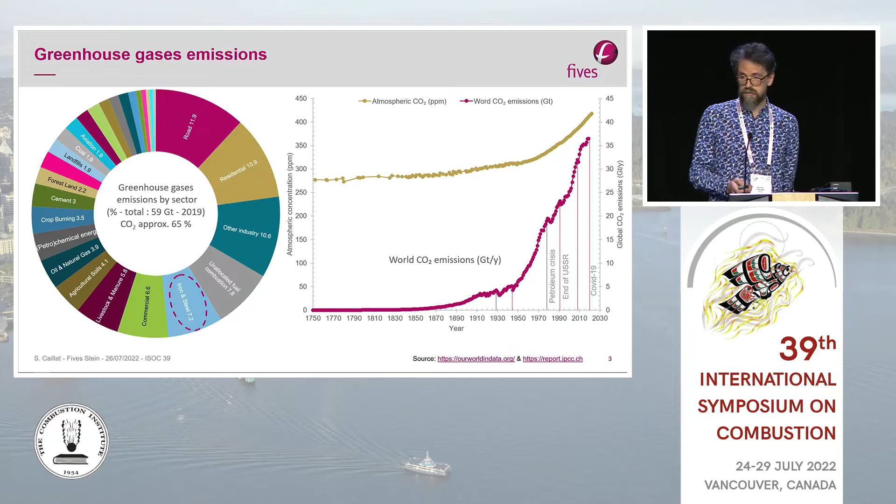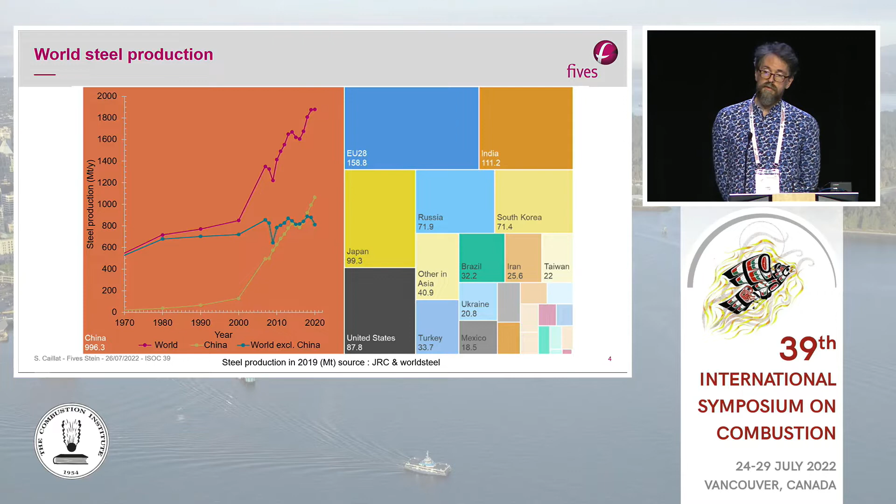And so the link with combustion is coal, because coal is used in a big part of the process to extract the iron from the iron ore. And this consumption of coal is almost the same as the quantity of steel we produce. So it's almost 1.1 gigatons of coal that is consumed every year. So you can do the math if you want, but if you see 1 gigaton of coal that is burned, it's a huge quantity of CO2 that is released in the atmosphere.

And this is where the efforts are to be put now to reduce the CO2 emissions by using other methods of extracting the iron. And the way is called DRI, and for the moment this way is only 5% of the total production, and this needs to be increased. The problem is that there are technical solutions, but it needs a large quantity of electricity if we want to use hydrogen, to create the hydrogen. So we need a nuclear reactor near the place where we produce the steel. This is possible from a technical point of view, but as you can imagine, it's huge investments.

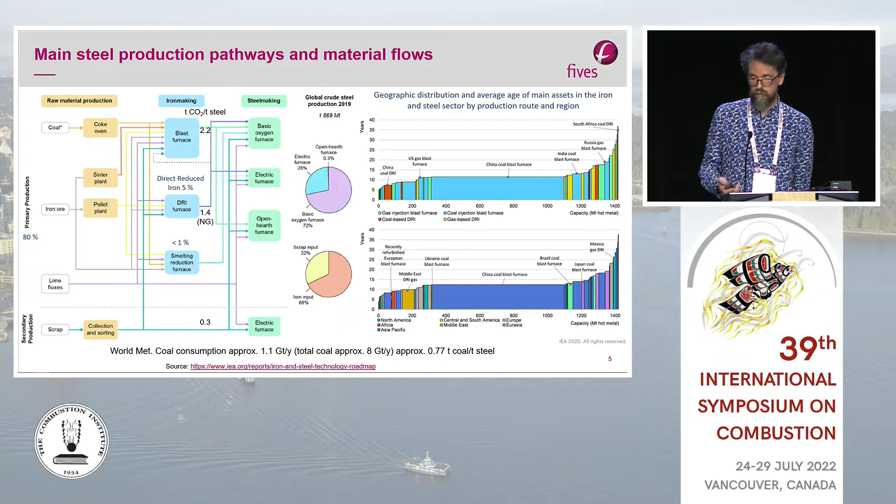And the lifetime of the steel production units is very long. It's tens of years. And on the right side, you have some idea of, I'm sorry, it's a little bit small on the screen, but it's all the steel producers in the world and the average age of the plants. And since the lifetime can be tens of years, if the plant is 10 or 15 years old, we will have to wait 10 or 20 more years so the investments are possible. Otherwise, the plant is too new to make some major changes. It will be absolutely too expensive. So this is in short.

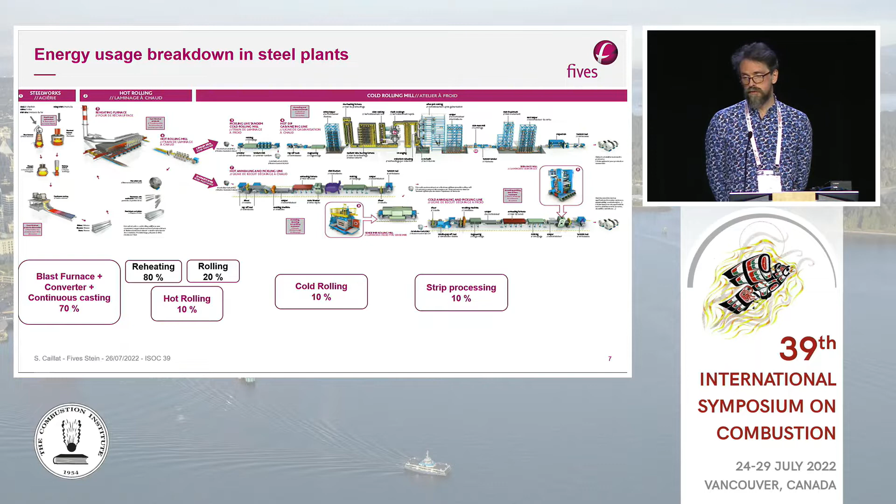Here is an example of what we make in our company. We are not the only one. Just to show where the energy is used. Most of the energy is in the steel production, but also 30% is in the part where, after you make the steel, you must transform it to make it usable to make a car, chairs, whatever you want. And this also is 30% of the energy that is used, and also everybody is working on how to reduce the CO2 emissions from this area of the steel production.

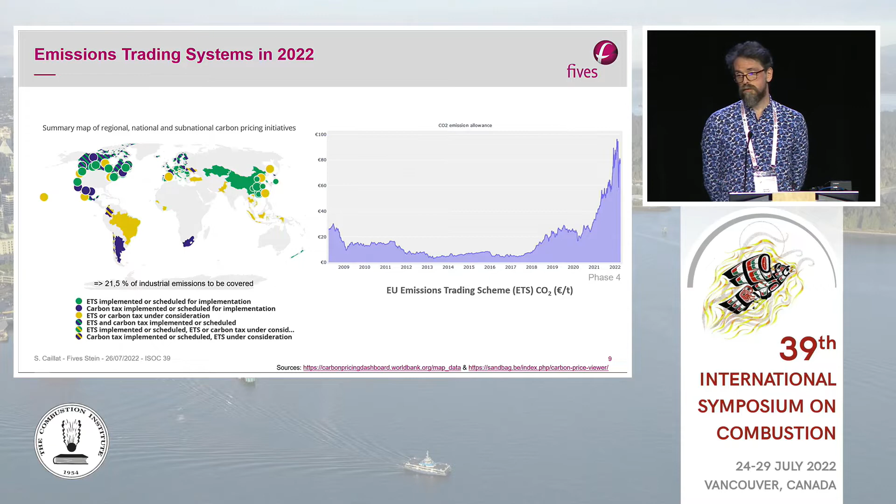For example, this is the price in Europe, and you can see that there is a huge increase in the price of CO2 emitted. So this is an important point to push to lower the emission. So that's all for me.

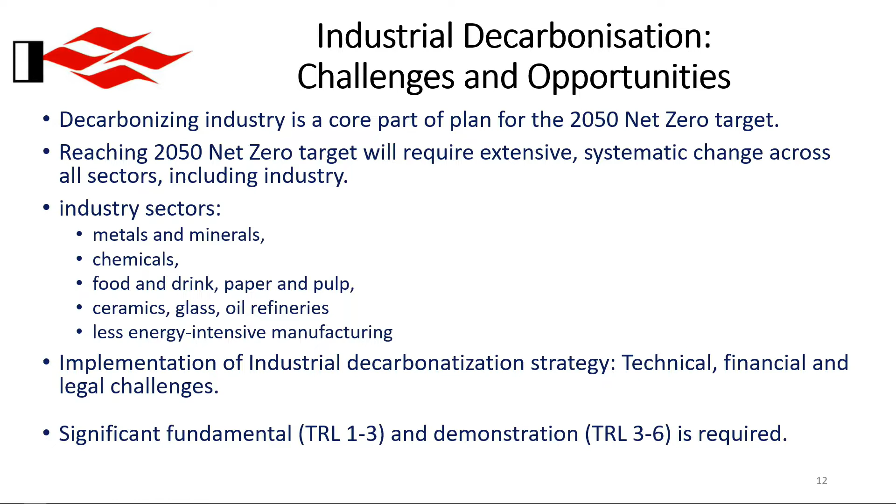So, if we look at the very recent data from the IEA, the Tracking Industry 2021 data, you clearly see the reason Sébastien just talked about, why industrial decarbonization is important. Looking at the data for 2020, global emission from industry was around 8.7 gigatons of CO2. That's around 26% of global emissions, even taking into account that there was a reduction in 2020 of 1.6% due to COVID-19.

Now, if we want to reach the net zero target by 2050, we have to reduce this CO2 emission at a global level to under 6.9 gigatons by 2030. And that is a big challenge for researchers and for industry, to make sure that we find the technology pathway to deliver that. Next slide, please.

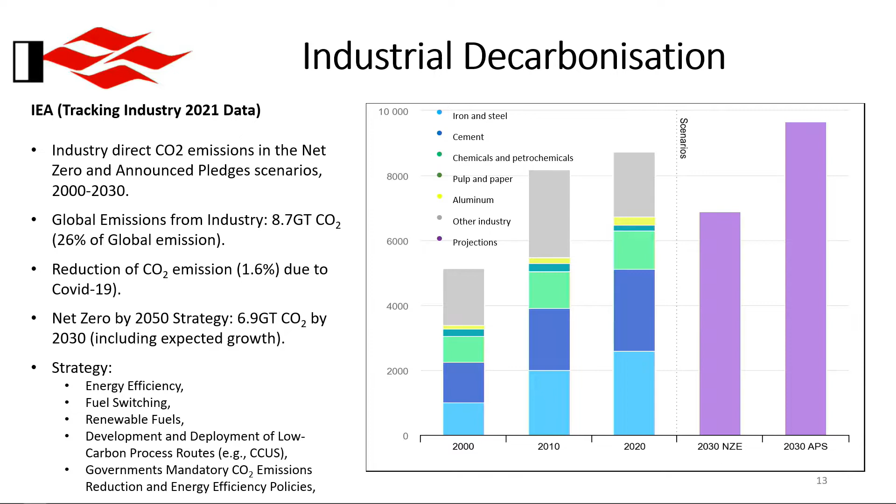So where do industrial emissions come from? Of course, we need fuel for the production of the feedstock required for the manufactured product. We need fuel for heat and cooling. We also need fuel for process heating and cooling systems, as well as for powering the machinery.

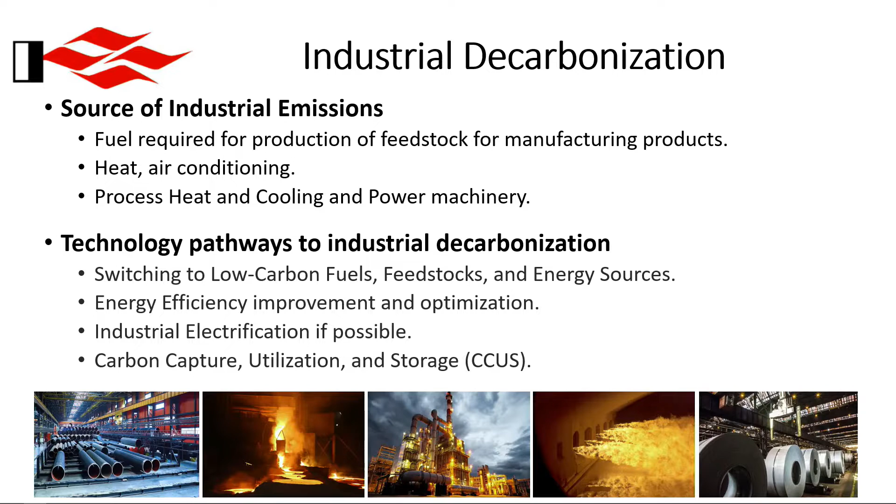Now, the technology pathway to industrial decarbonization is clearly defined in a number of important pathways. This includes, as you may have heard a lot about and done research on, carbon capture, utilization and storage, industrial electrification, and, I mention it with a cautionary note, energy efficiency improvement and optimization, and switching to low carbon fuels such as hydrogen and even hydrogen carrier fuels like ammonia. Next slide, please.

Now, what are these industrial decarbonization technology pathways? Well, if you look at energy efficiency, I believe it is the most cost-effective option in the near term. With the lowest cost, you can reduce the CO2 emission, by simple technology like installing or improving heat recovery systems, utilizing waste heat, especially low temperature waste heat, and also upgrading processes and equipment. In addition to that, we can also look at strategic energy management at the system level, which will also improve energy efficiency.

Carbon capture, utilization and storage is, of course, a technology that is available now, part of it, but it is an expensive technology. Existing technology that can be implemented includes oxy-fuel, and pre- or post-combustion CO2 capture using different solvents. However, where research is needed and where we can improve or implement

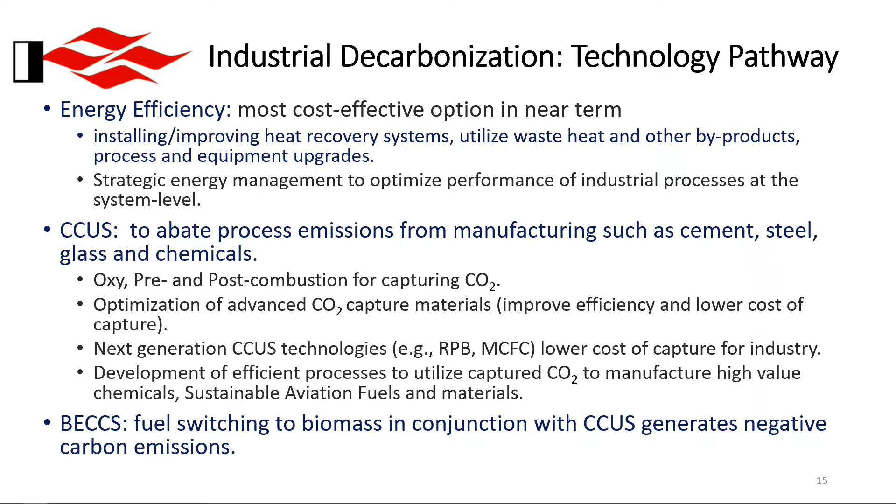And continuing with that technology pathway, fuel switching from fossil fuels, such as coal, liquid fuels or natural gas, to low carbon fuels, such as electricity if it's produced from renewable sources, or biomass, hydrogen or ammonia. So in this sort of area, development of fuel flexible processes and energy systems is important. How flexible is that energy system that can use different fuels? The availability of biofuels or biomass, and how to integrate these new systems with different technologies.

Now, as I mentioned before, industrial electrification is also important, provided the electricity is produced from renewable sources such as wind, or even nuclear, but it is not applicable to every technology, or every industrial process that needs to be

decarbonized. And finally, hydrogen, where at this moment there is a lot of interest in hydrogen to be used for industrial decarbonization. But two key points: if you want green hydrogen or low carbon hydrogen, the cost of hydrogen at this moment is very high, and also availability is an issue. And I'll show you the reason for it. Next, please.

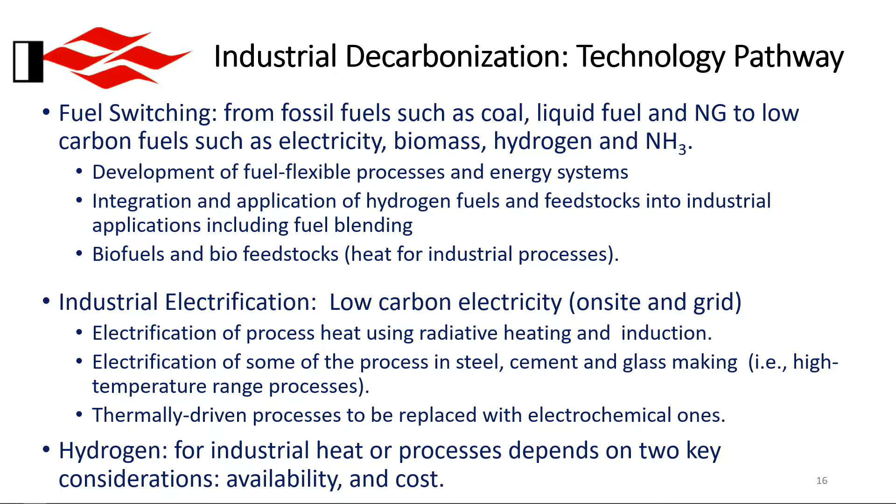Next slide, please. Yes. Now, if you look at demand for hydrogen, you can see that in every sector there is a requirement for hydrogen if they want to decarbonize. Whether you're using it for decarbonizing heavy industry or transport or heat for commercial or domestic use, all require hydrogen. And that hydrogen can only come from renewable sources or nuclear energy, green hydrogen, or blue hydrogen

from natural gas. However, that option, at least in the UK and in Europe, is under question because of the security of natural gas supply and the high cost of hydrogen. So based on that sort of reasoning behind industrial decarbonization, let's look at what the IEA Net Zero 2050 states. Next slide.

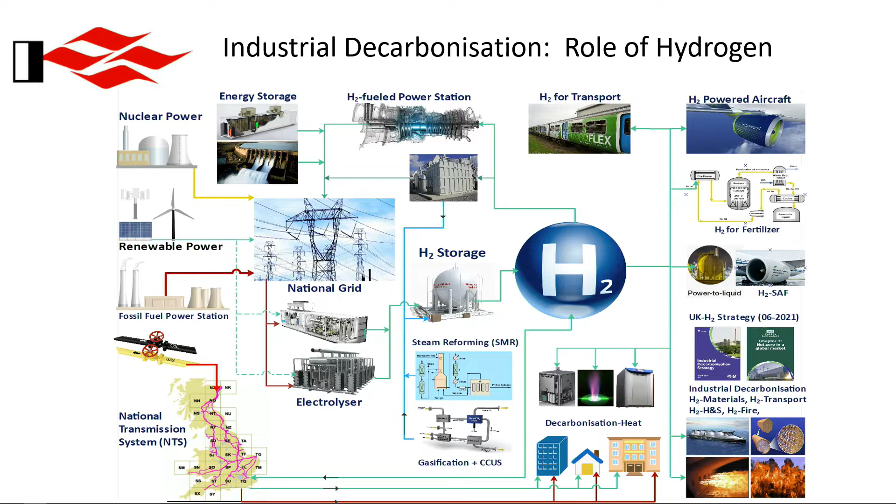Next slide, please. Yes. There are 7 key pillars that have been identified in IEA Net Zero 2050 that are very important in order for us to reach the net zero target. And number 5 of these key pillars is hydrogen and zero carbon fuels.

And if you look at that prediction, as reported by the IEA, you will see that different sectors within industry, like refineries, iron and steel, chemicals, all these different energy intensive industries, by the year 2050 will use plenty of hydrogen, green hydrogen or blue hydrogen if available, in order to contribute to that net zero target.

And these numbers clearly show that at this moment, for example, the refineries use some, chemicals again, and other uses, but you see that the use of these fuels in other sectors in industry significantly increases over the next 30 years. Next slide, please.

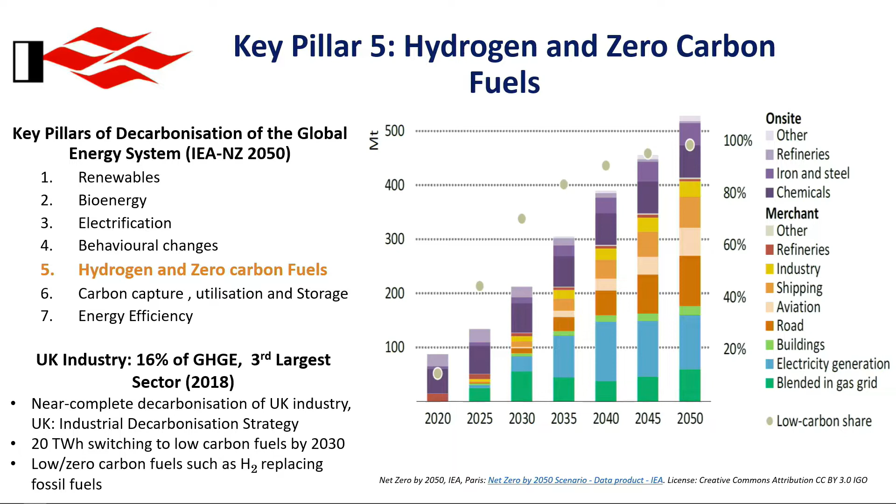Of course, at the Combustion Symposium, our research colleagues know that hydrogen was one of the first fuels that was looked at. And especially if you look at the first Combustion Symposium proceedings, you will see that a lot of hydrogen research has been reported. At the time that, for example, I was starting my PhD, I used to look at the papers that Professor Graham Dixon-Lewis and Professor Alan Williams did in the 1960s on hydrogen.

So hydrogen combustion has been looked at in great detail, especially by the researchers from the Combustion Symposium. It has certain properties that are beneficial to the combustion process, and there are also some disadvantages associated with it. Next slide, please.

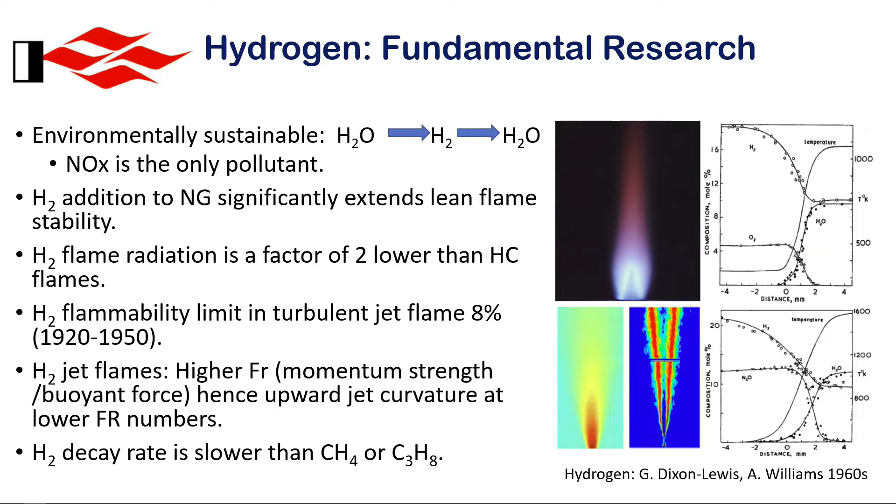One project that we have been working on in the UK, funded by the UK government, is looking at how to decarbonize, for example, the industrial sector using biofuels and comparing that to hydrogen. Some of these data will be published very soon, but if you look at these data, you clearly see that for hydrogen, before industry invests significantly in it, there are some fundamental challenges that need to be identified and resolved, and solutions found for them.

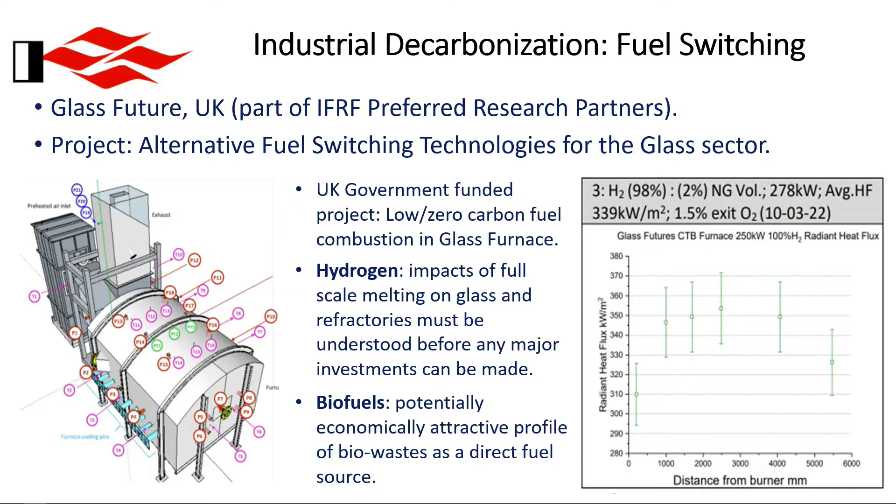And on the biofuel, this fuel that was produced from waste is also limited in availability, but potentially economically attractive for direct replacement of the fossil fuel. And finally, just to look at, next slide, to look at this

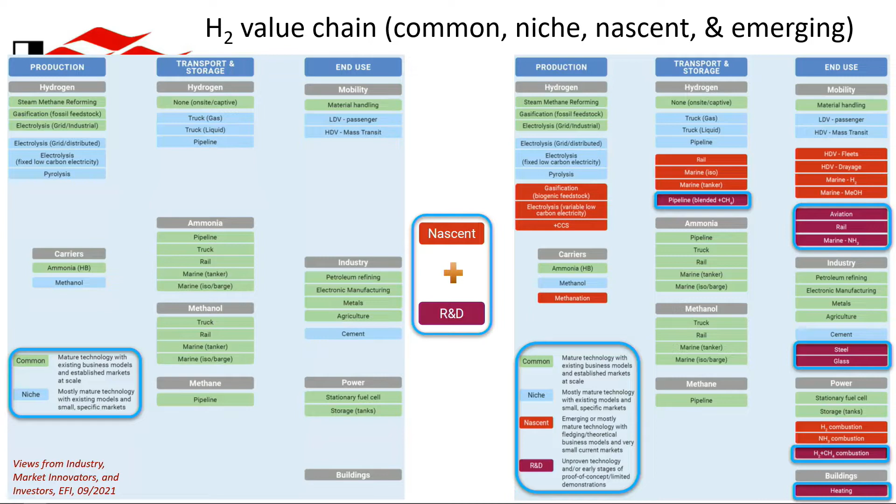So just next one. And there is a lot of international collaboration that you... Mohamed, you have 1 minute left, please. Yeah, sure. Thank you.

And I would recommend you to have a look at the CEM. And next one, please, my concluding remarks. So, the foundation to deliver net zero for industry. What is important? Carbon pricing, not only at the national level, but at the international level. Market regulation, decarbonization standards for development and investment flow, and making that culture change to get consumers to choose low carbon products, or getting investors to choose low carbon for investing.

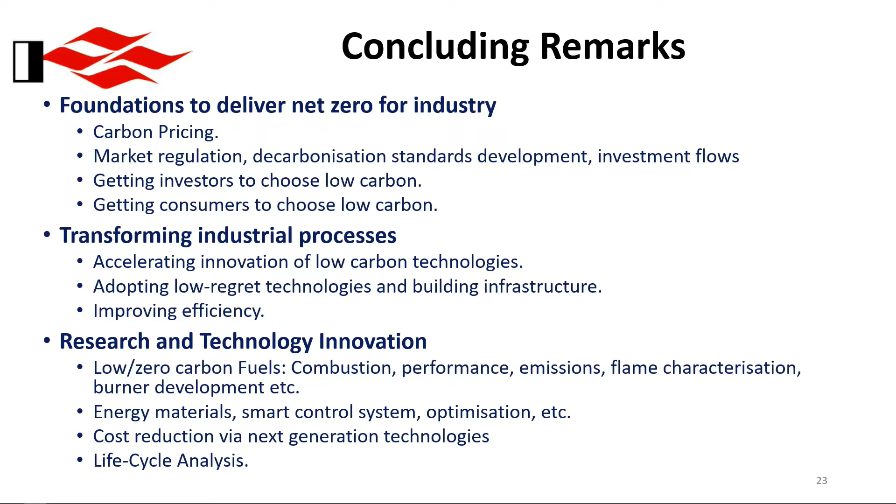In terms of transforming industrial processes, accelerating innovation of low carbon technology is important. Adopting low-regret technologies and building infrastructure is important, and improving efficiency. And finally, research and technology innovation in terms of low and zero carbon fuels, combustion performance, emissions, flame characterization, burner development, energy materials, especially for hydrogen, smart control systems, and cost reduction. Technology is also important, and we should not forget, whatever we do, we need to look at life cycle analysis. The next slide is mainly for the flame foundation, but let's go through two of them together. Next, please.

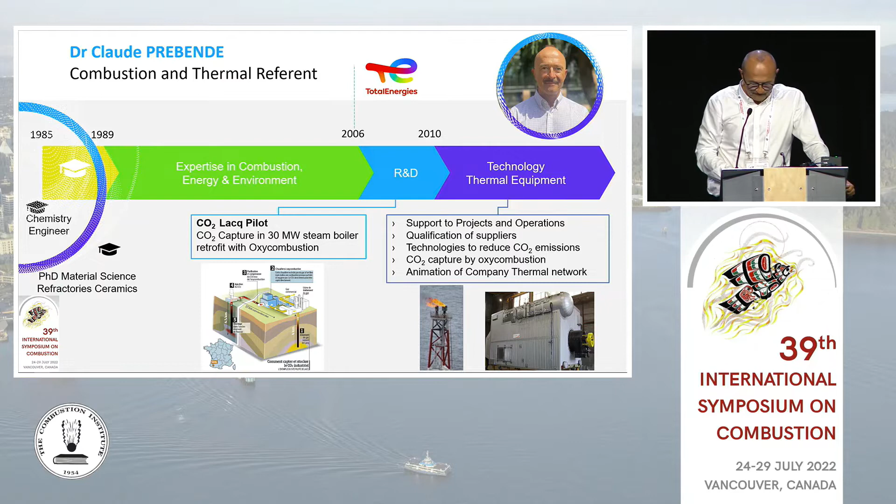Today I am in charge of fired equipment specification and mechanical design in our oil and gas facilities, offshore and onshore, refineries, petrochemicals, and power plants. More and more, I am involved in an R&D program to reduce CO2 emissions. Total Energies is a major international oil and gas company and has existed since 1924, almost 100 years. My company is undergoing a profound change. Last year, Total became Total Energies, a new name for a new ambition to become a major player in the energy transition and to achieve carbon neutrality by 2050, together with society.

Historically, Total Energies continues to produce oil and gas, mainly liquefied natural gas. And for 16 years, Total Energies has been involved in solar energy by developing a new generation of photovoltaic panels, and more recently, wind energy, mainly offshore. The purpose of my presentation is focused on the solutions we are implementing progressively in our facilities to decarbonize our operations.

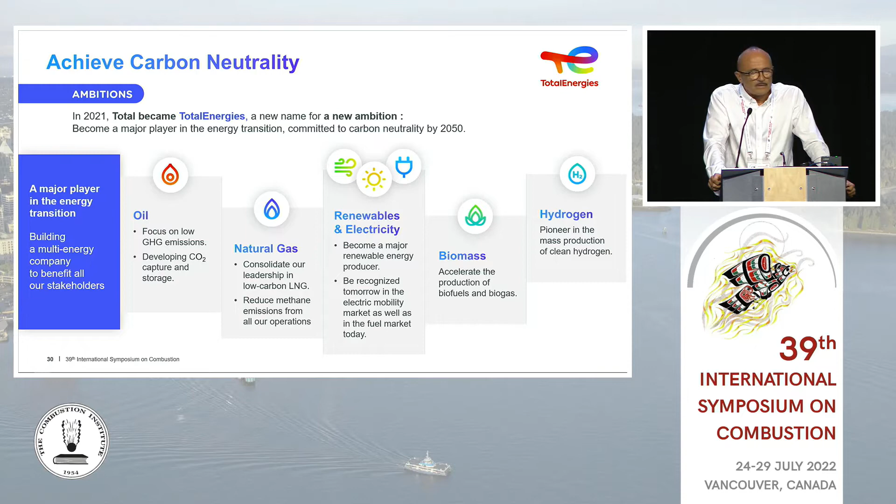In the past and today, the CO2 emissions come from gas turbines, boilers, furnaces, other fired equipment, and flaring. We measure the methane emissions in our flare flames ourselves with a drone. In fact, there is insufficient air inlet in the flame to burn all the flare gas. And you know that methane is more than 25 times as potent as carbon dioxide at trapping heat in the atmosphere. There are two paths to reduce GHG emissions. Either we reduce or replace hydrocarbon fuel gas, or we capture emitted CO2.

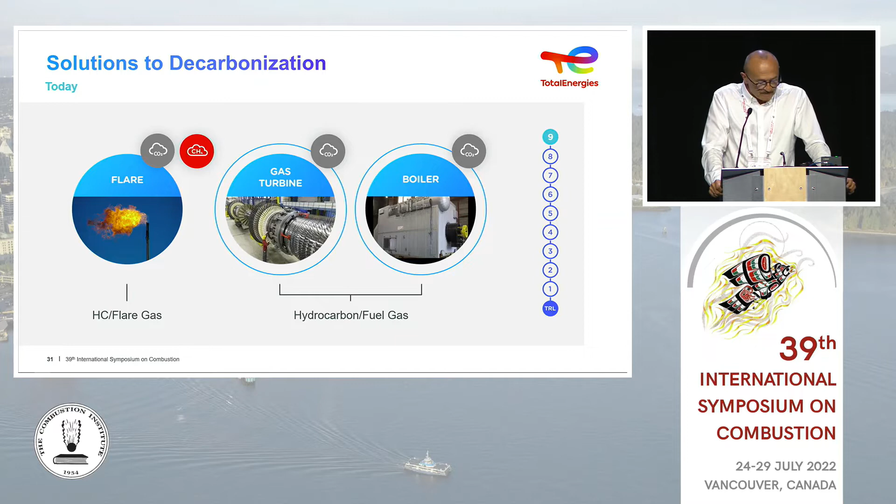The first solution is the recovery. It's better to valorize the recovered flare gas instead of burning it. And we recover the heat from the hot exhaust gas from the gas turbine to produce steam, and this steam is used in the steam turbine to produce high efficiency electricity. The maturity of the technology is very high.

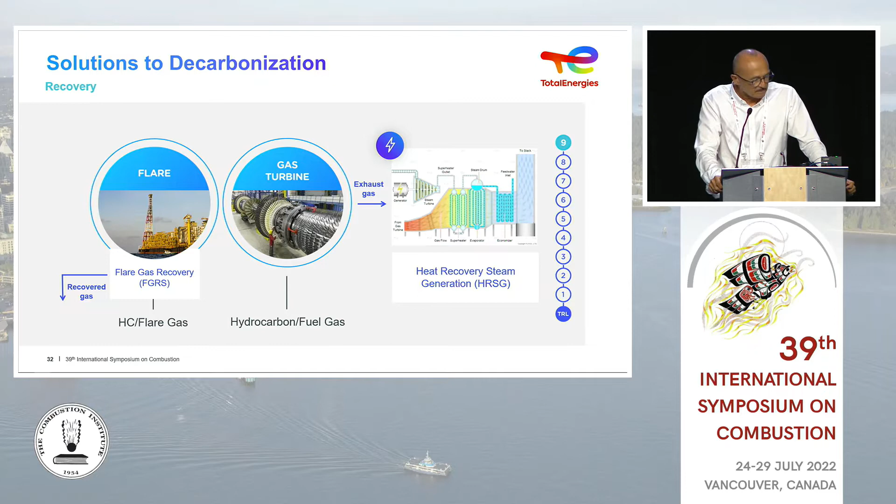The second solution is electrification. As I told before, Total produces renewable energy by solar and wind energy. On the right, you see an electric boiler which could replace a gas firing boiler, but there are two challenges to implement this technology: to install high voltage electrical supply, and to control the water quality, mainly the conductivity of water, because this technology is based on electrodes.

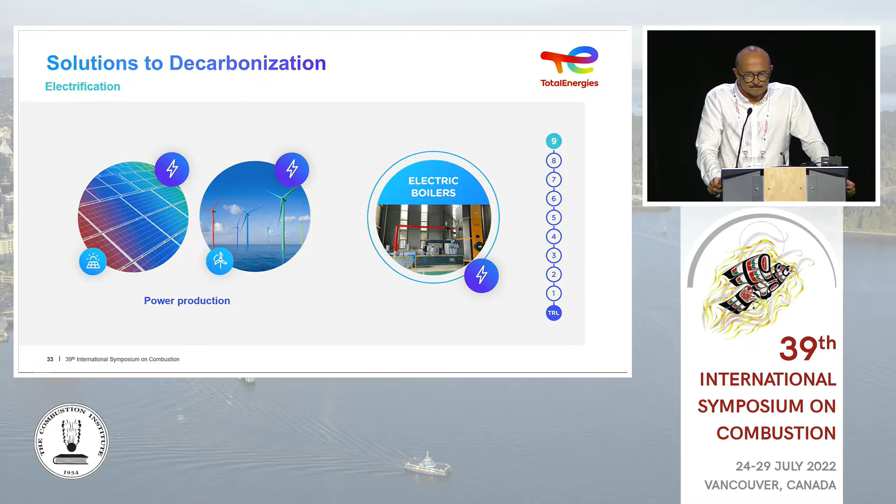And the strategy of TotalEnergies is to use hydrogen and ammonia mainly in the gas turbines, because we have 200 gas turbines in our fields, and it's very difficult to control the CO2 emissions. Using hydrogen and ammonia this way is a good way. The challenge is to control the NOx emissions, the stability, the thermoacoustics, etc. There were many conferences yesterday about this topic. And there are simulation, modeling and testing programs ongoing with laboratories.

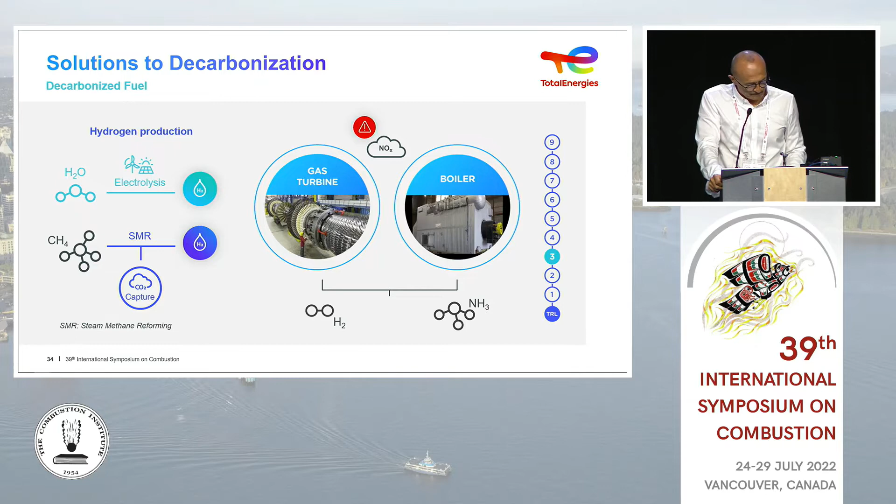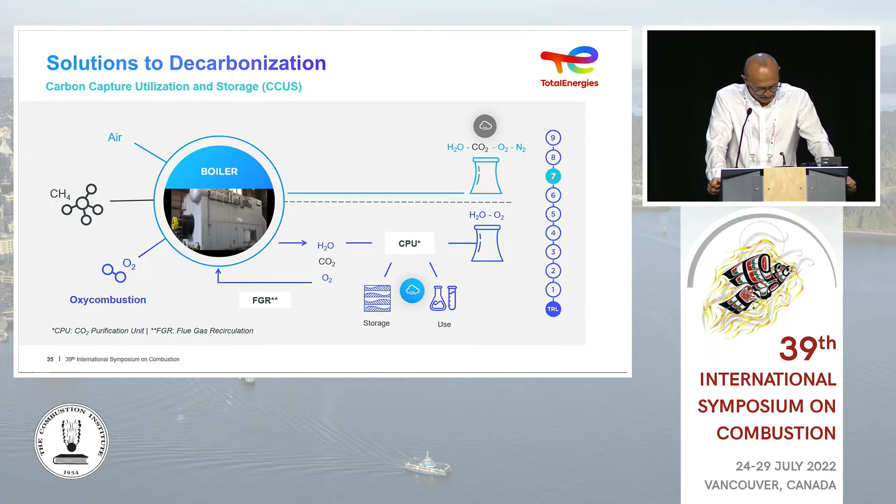In conclusion, I would say that TotalEnergies encourages all researchers around the world to develop these emerging technologies as efficiently and as quickly as possible, to integrate them in our facilities or our partners' and customers' facilities, because we are committed to carbon neutrality by 2050.

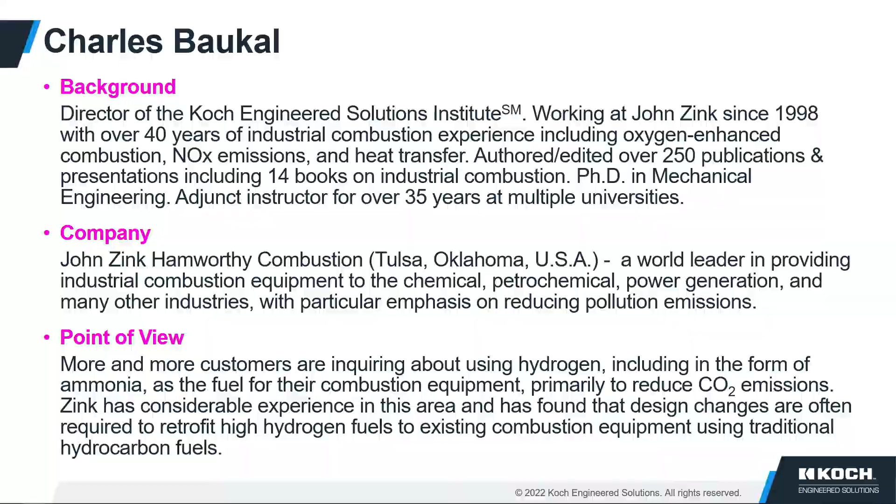John Zink provides equipment to the refining, the petrochemical, chemical, and power generation industries, and TotalEnergies is one of our customers. So we're coming at it from the perspective of how do we burn various fuels. And as you know, there's lots of interest in using hydrogen for combustion, predominantly because it doesn't make any CO2. It also doesn't make any carbon monoxide or smoke. And according to IEA, it's an important piece in the Zero Emissions 2050 puzzle.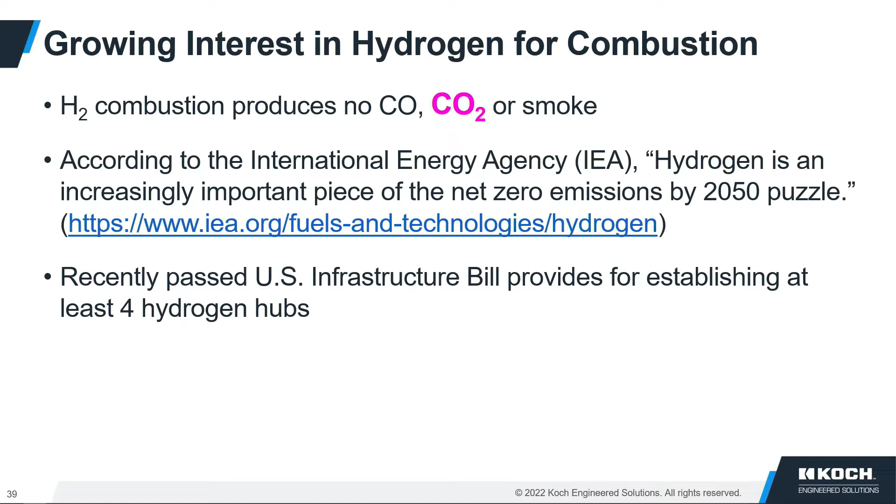In the United States recently, an infrastructure bill was just passed where they want to establish at least 4 hydrogen hubs. Next slide, please. I live in the state of Oklahoma, and we are looking at partnering with a couple of neighboring states to form a hydrogen hub. For our test facility, we get our hydrogen from Louisiana, and that's about a 12-hour drive by tanker truck. So we don't have any large-scale hydrogen production at the moment in the state of Oklahoma, and that may change with this hydrogen hub.

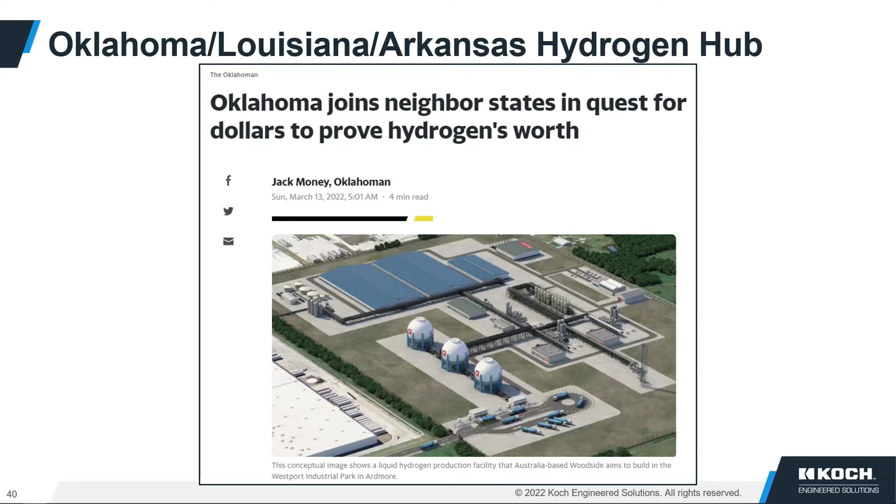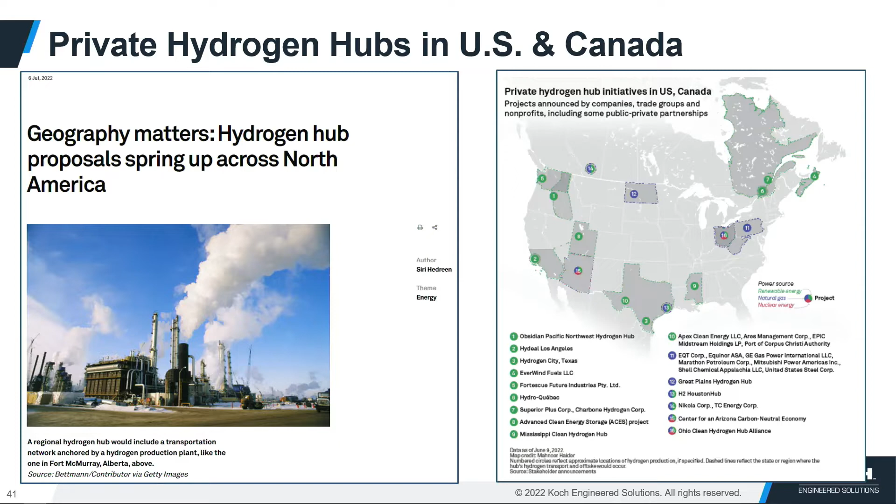Next slide, please. They're looking at establishing hubs not only in the United States, but also in Canada. The map on the right shows a bunch of them that are in the planning phase now. So great interest in forming these hydrogen hubs. Next slide, please. In Japan, Mitsubishi is establishing a park dedicated to hydrogen combustion, particularly with power generation.

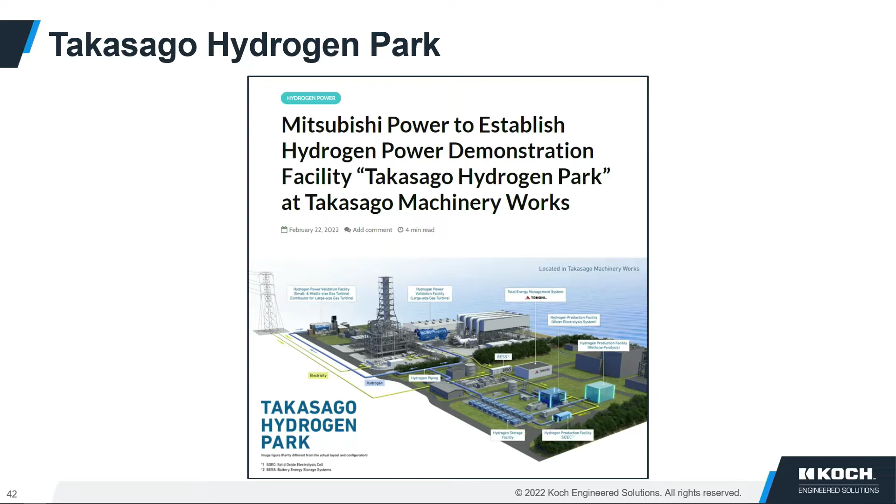By coincidence, this morning, there were 2 things that appeared in the news that were new, at least to me. One of them is the Nuclear Hydrogen Initiative, where 40 participants are getting together around the world to look at using nuclear energy to produce hydrogen. And the second one is a company called EPRO Advanced Technology has developed a powder that's predominantly silicon. So in a powder form, you can take this chemical, drop it into water, and it generates hydrogen. And if that is successful and cost effective, that would be a major advancement because, as you know, one of the challenges with using large-scale hydrogen is transportation. So if you could use a solid powder, that would really give a lot more flexibility.

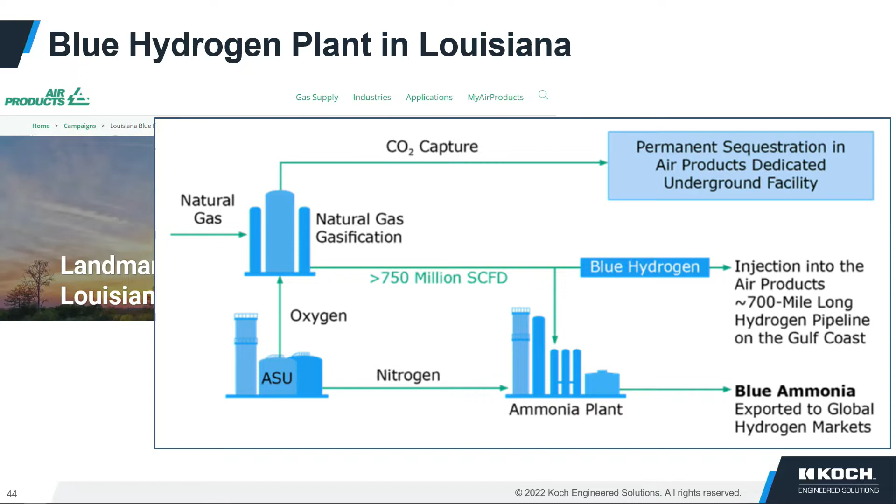Next slide, please. And the U.S. Department of Energy has a very big program looking at all aspects of hydrogen, its production, its distribution, its usage in a variety of industries. So lots of interest, lots of research being done in this area because of the potential of eliminating CO2, depending upon how you make the hydrogen.

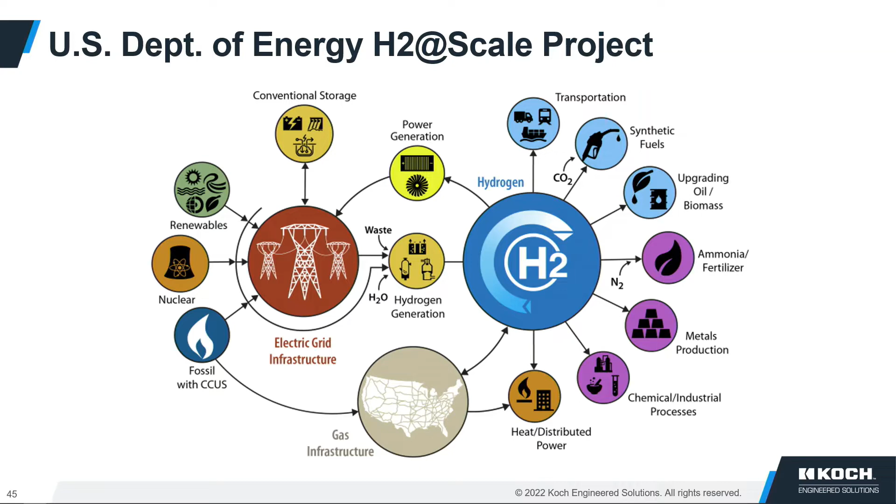Next slide, please. So you've heard a little bit already about different colors of hydrogen. Of course, hydrogen doesn't have a color itself, but when we talk about how it's made, it depends on what is the source of the hydrogen and what's the energy used to make it. And you've heard about blue and green hydrogen. If you were to make hydrogen with electricity from nuclear power, that would be considered red. Some folks call that pink. So a variety of ways we talk about that. And of course, the holy grail is to make it with renewable energy, such as wind, hydro, and solar.

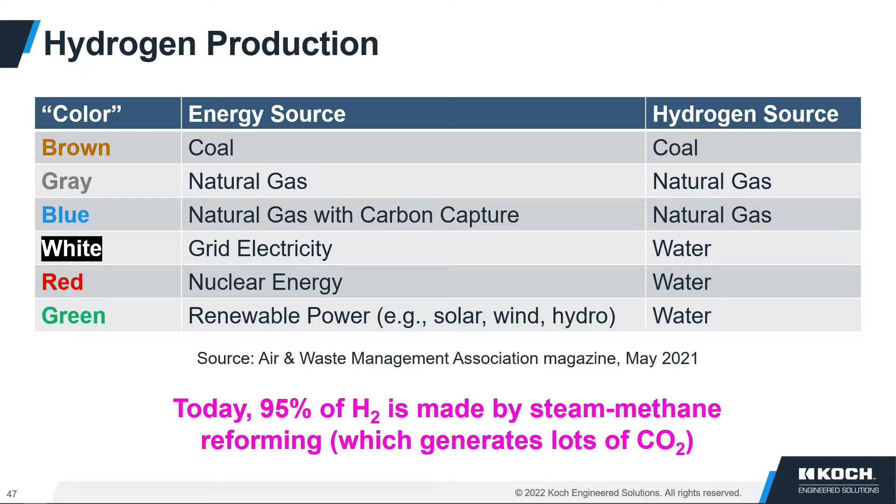And next, please. Currently, 95% of the hydrogen that's made in the world is by steam methane reforming, and that unfortunately generates lots of CO2. So it's very cost effective, but it's not very environmentally friendly. So this is what's being targeted, especially using electrolysis with electricity made by something other than a fossil fuel.

Next slide, please. So you at the symposium are very well aware of the differences between methane and hydrogen. We have a lot of experience burning hydrogen, but it is a different fuel. So if customers think that they can simply change a valve and switch from one to the other without making any changes, that's probably not going to happen. The changes, generally speaking, are not major, but nonetheless, they do need to be taken into account. On the good side, hydrogen is very easy to burn.

From a combustion engineer's perspective, we don't have to be very accurate with our mixing, but on the negative side, it's a small molecule, it has a high diffusivity, it leaks very easily, it has a very wide flammable range, so it's easy to ignite, and therefore the transportation and storage is clearly an issue for that.

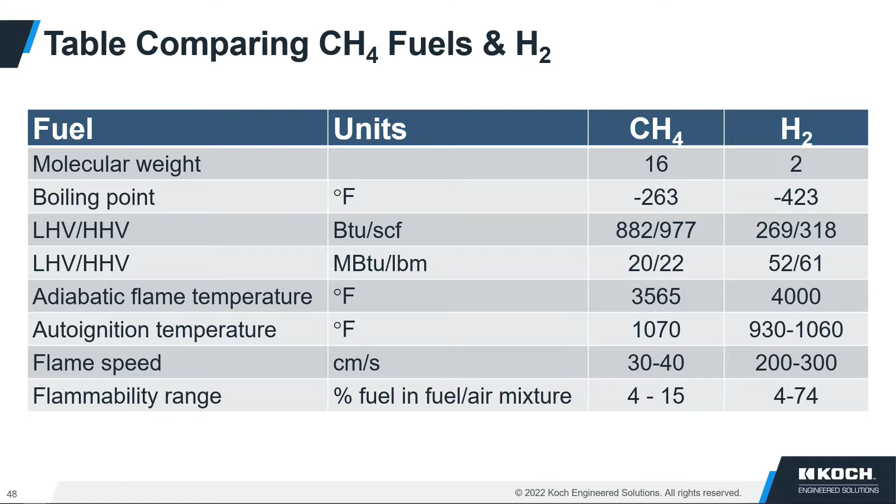Next slide, please. So clearly the main advantages are no CO and CO2. Depends on how we make the hydrogen, of course. If we use steam methane reforming, which is the current way today, then we can make lots of CO2. But if we use renewables and electricity, we can make that almost zero.

Another potential benefit, not nearly as of high an interest as reducing CO2, but hydrogen requires less air compared to other fossil fuels. And that means if a customer is limited on their capacity, they may be able to increase that just by switching fuels. Next slide.

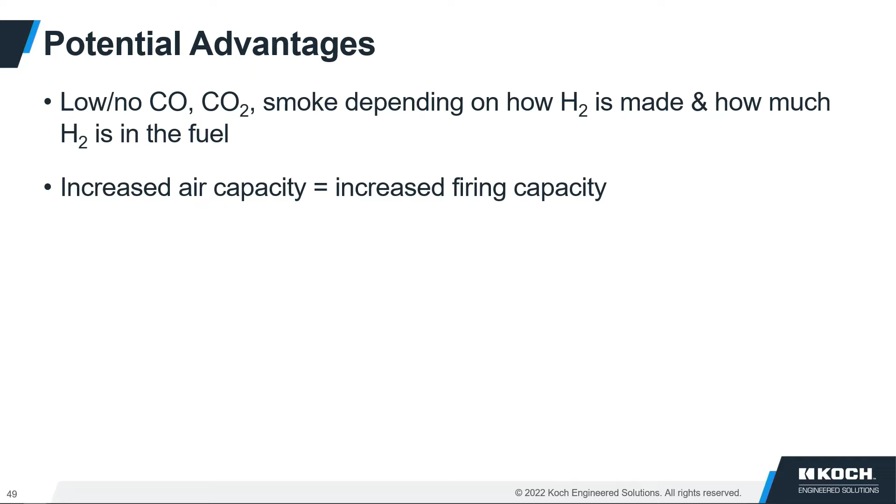And as you heard, one of the potential negatives of using hydrogen is more NOx. It has a higher adiabatic flame temperature, and therefore that higher temperature generates more thermal NOx. The good news is there's no prompt NOx, but in general, in most industrial applications, the prompt NOx is a relatively small portion of the overall NOx.

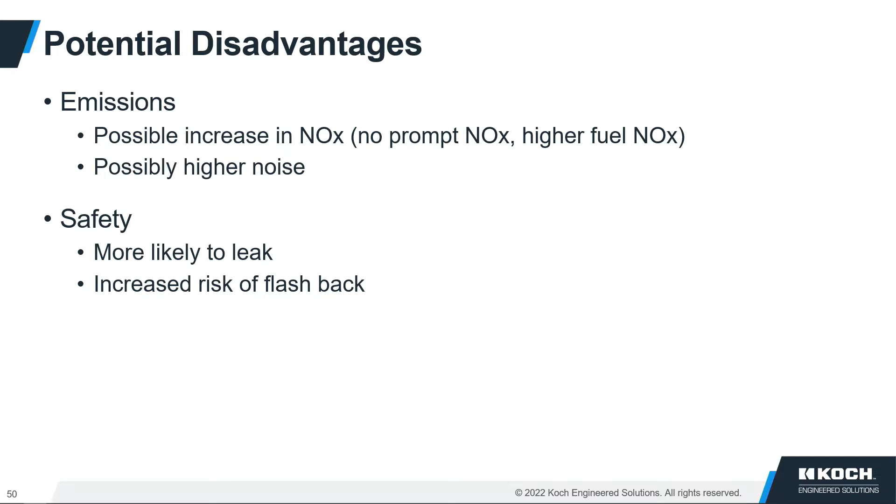Next slide, please. And of course, safety, we just mentioned that. Not only does it have a higher propensity to leak, but it also has increased risk of flashback. Next slide, please. So in conclusion, hydrogen has the potential to eliminate CO2 and soot emissions. Next. It is different than most other fuels, so that needs to be taken into account. Next. So we do recommend thoroughly analyzing processes before making the switch.

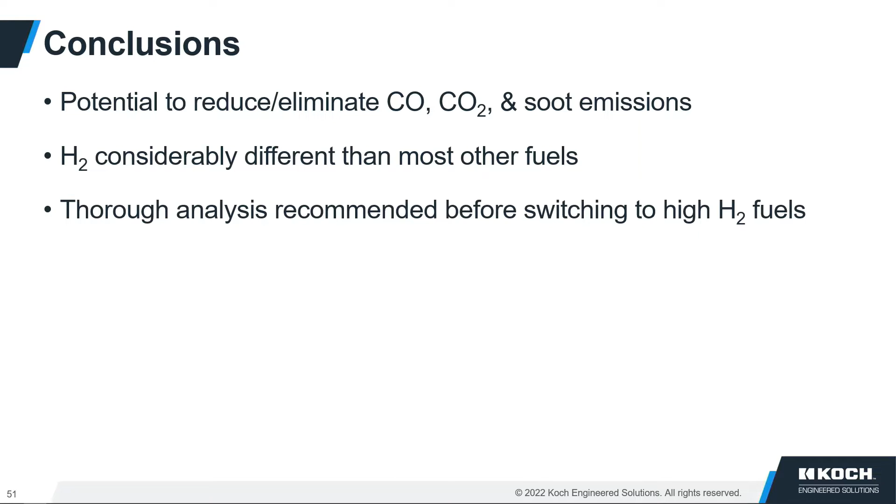And you're going to hear more about this later, but ammonia might be a good intermediate because it's much easier to carry ammonia than hydrogen as a gas itself. And to answer the question at the very beginning, is hydrogen an important future fuel? I would say probably, maybe even definitely.

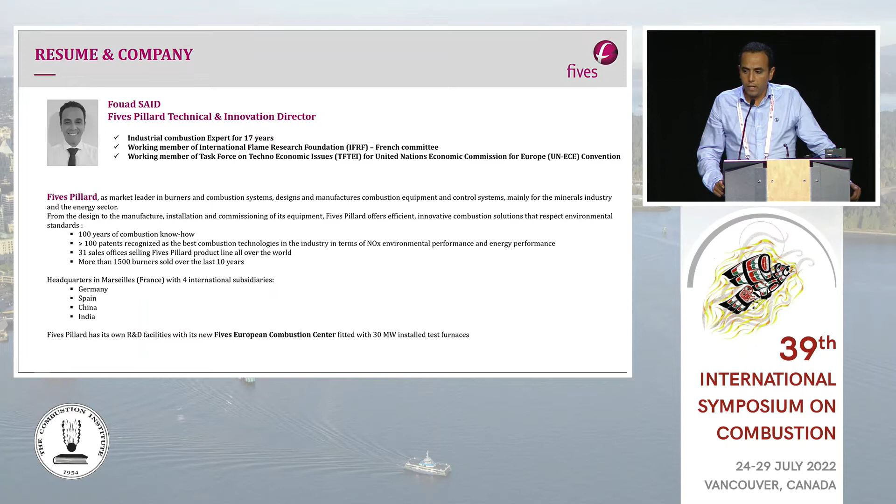In terms of R&D, we have our own facilities based in France, our European Combustion Center, with 30 megawatts installed test furnaces. I've been working as an industrial combustion expert for 17 years. I'm a working member of the International Flame Research Foundation, member of the French committee, and I'm also a working member of the task force TFTEI, Techno-Economic Issues, for the United Nations Economic Commission, especially for Europe.

So today, I will talk about the cement industry. As you probably know, the cement industry is one of the biggest polluters in the world, with around 8% of the total CO2 released in the atmosphere. So you can imagine that the cement companies try to figure out this problem and propose solutions. The first one to reduce the CO2 footprint in the cement industry is to have a good burner. Good burner design means optimizing and reducing the specific consumption, how much energy is needed to produce 1 ton of clinker. So this is the basis.

On top of that, we are also proposing smart burner technology, smart sensors, which are located on the burners and connected to gateways and DCS in order to monitor all the burner parameters for a better adjustment. Another common way to reduce the CO2 footprint in the cement industry is the usage of what we call alternative solid fuels, ASF. Could be plastics, shredded tires, fabrics, and so on. And there are 2 ways to valorize this ASF: combustion or gasification.

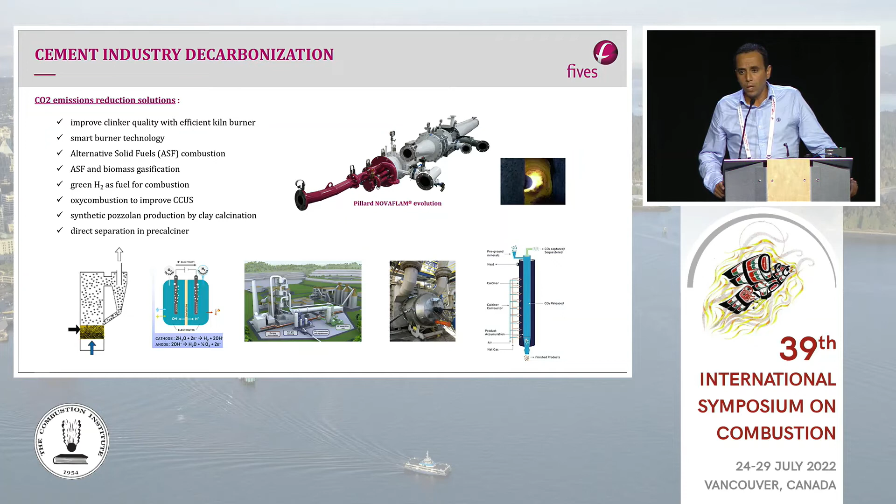So I wanted today to have a special focus on the oxy-combustion in the cement industry, which is combined with firing alternative solid fuel, because this is one of the most promising technologies under study. But of course, there are some technological locks.

The first one concerns the alternative solid fuel modelization, because when we are talking about solid particles, it is hard to have a good idea of the size, the shape, 2D shape, 3D shape, the density. There are no universal models for the CFD computing.

We need to take into account the different phases, so drying phases, devolatilization phases, the combustion of the volatiles, the combustion of the solid fractions, the particle swelling, the radiation, and of course, the ash management. So we are trying to build some solid models in order to be able to modelize any type of alternative solid fuels.

The second technological lock concerns the chemical reactions inside the kiln, because of course when we are talking about oxy-combustion, we are talking about high temperature levels, 2,500, 2,800 degrees C, and we need for sure to have a CO2 flue gas recirculation in order to master the kiln temperature level.

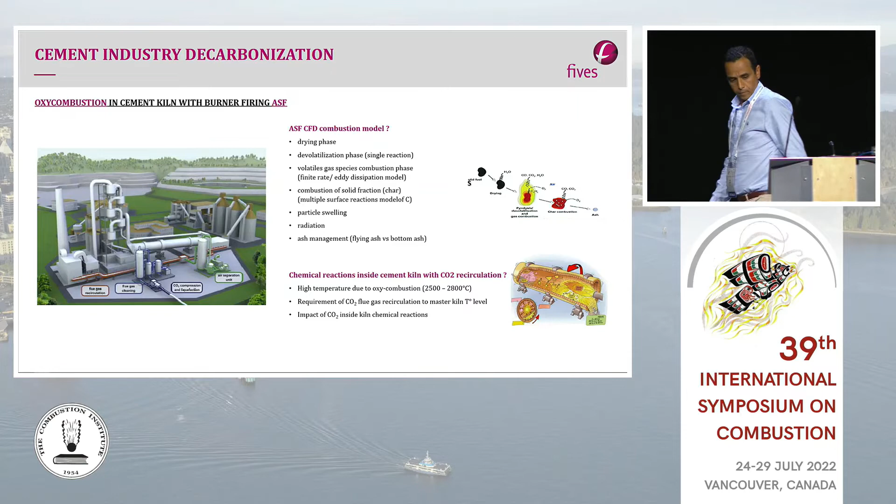Okay. Thank you very much for the opportunity to make a presentation here. My name is Fujimori, from IHI Corporation. IHI Corporation is one of the Japanese heavy industries. And we supply power generation systems such as boilers, gas turbines and internal combustion engines. And also we supply ammonia production plants, power plants, and chemical plants.

So today I'd like to introduce the current status and the challenges for ammonia power generation. And this is generally my conclusion: maybe the solution for energy transformation depends on the local conditions, such as energy resources, renewables, and economical and geographical situations.

For now, I come from Japan. Japan is very, how to say, isolated geographically and also geopolitically. It's very difficult to connect wires or pipelines to neighboring countries. So in that case we need energy. Also, the hydrogen should be transported by ships. So in that case, ammonia could be one of the solutions.

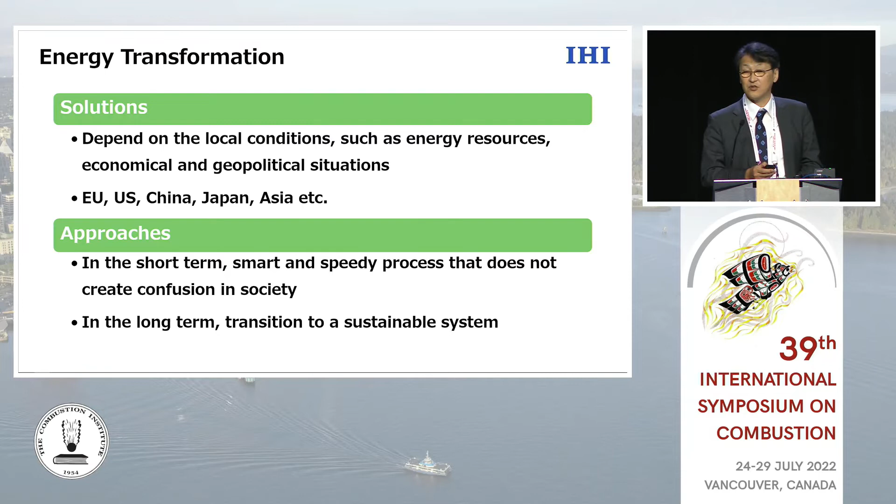And also another point is how to realize this process. I think in the short term, a very smart and smooth transition process is necessary, which does not create confusion in society. And in the long term, of course, sustainable systems.

And ammonia is categorized in the hydrogen-based family of fuels, so everything comes from hydrogen. And ammonia is combined, as you know, with nitrogen in air. And the other pathway, the bottom line, is synthesis with CO2. CO2 is captured from exhaust gas or so on.

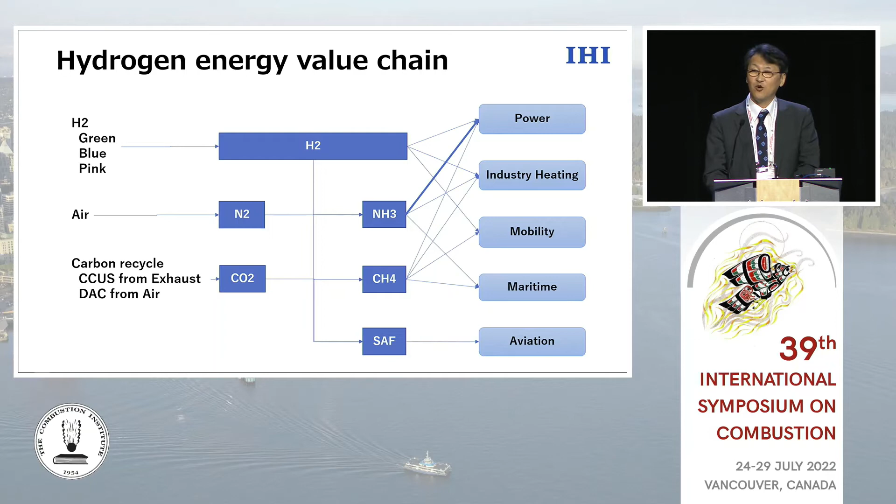And for ammonia, the right-hand side is utilization of ammonia. One of the main paths is power generation. And also, ammonia could be used for industrial heating. And now a very hot topic is maritime, for ship engine fuels. So our company is actually involved in all processes, but today I'd like to talk about power generation.

This is ammonia's value chain, and as the previous speaker said, for ammonia and hydrogen there are basically many colors of hydrogen. I just say blue and green ammonia, and now blue ammonia is very promising for mass production, but it's necessary to capture CO2.

And also the ammonia carriers and storage, as you have shown, already exist, because it's already an internationally traded product for fertilizer or chemical feedstocks. And the issue is how to use it for the energy transformation. That is the technological challenge for ammonia to establish ammonia value chains.

In yesterday's sessions, one question arose: how much hydrogen goes from Australia to Japan? I just estimate that if the hydrogen is 100, maybe in Japan it's about 65 to 70, if you use a best practice way. That's a kind of answer to the question.

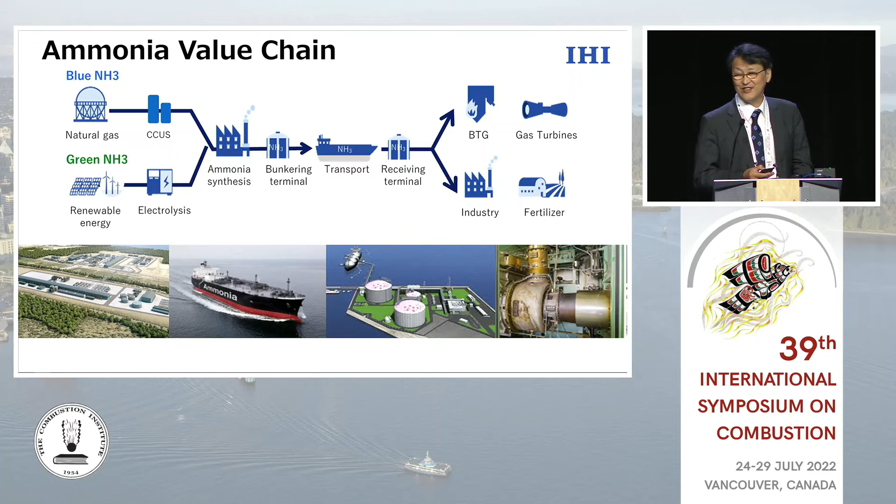Today I'd like to introduce two power generation methods. One is co-firing with coal combustion, and this project is already going to the semi-commercial stage. This picture shows JERA's 1,000 megawatt coal-fired power station. The reason why we chose to start with coal co-combustion is low technological risk, and also low cost, easy implementation and speed. That's why we started from this position. But this is, how do you say, the beginning.

It is to establish ammonia supply hubs. In the future, of course, increasing the co-firing rate or maybe ammonia solo combustion boilers will be considered. Technologically, at present, we achieve 20% co-firing. The NOx emission level is the same or less than coal combustion itself, so no change is necessary for gas treatment systems. Heat transfer is a very minor effect, maybe 2 or 3% change, so it can be accommodated by present boiler designs. So we started from this one.

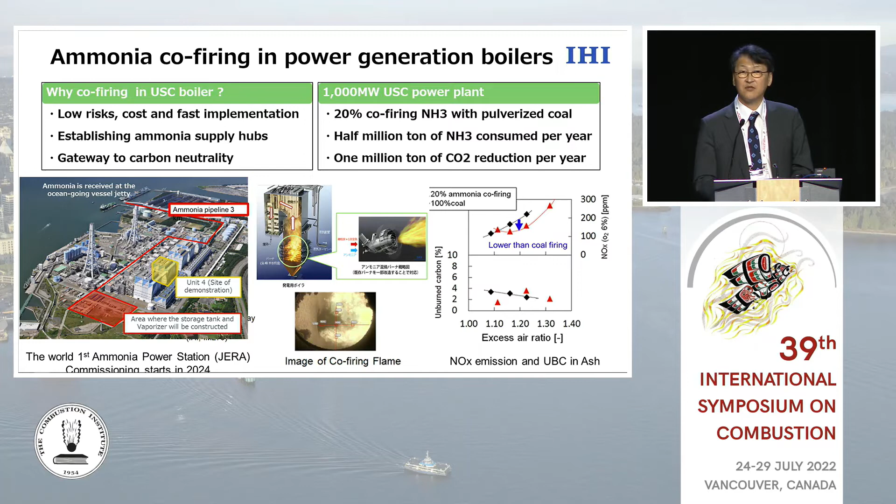The next one is ammonia co-firing with gas turbines. In the future, more efficient gas turbine power generation systems are necessary, so we are also seeking to develop combustion technology for gas turbines. Now we choose spray ammonia combustion systems. The reason is that in the future, these plants will work with renewable energies and also meet demand. So quick response and flexible operation is critical, especially for middle class or smaller class gas turbines. So in this case, we chose this system.

It is also technically very simple, just pushing up with pumps, with no need for a vaporizer and no need for reforming or cracking systems. So it's very easy to operate for changing load speedily. This graph shows what we achieved: a 2 megawatt small gas turbine with 100% pure ammonia combustion.

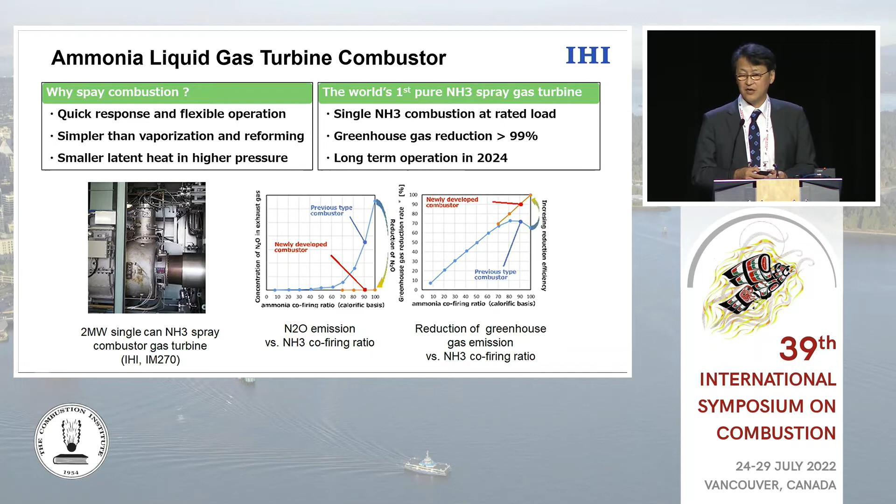The middle graph shows N2O emissions. In the previous model combustor, pure ammonia combustion actually generates N2O. The right-hand graph is the greenhouse gas emissions reduction rate. As you see, N2O has a very strong greenhouse gas effect, so with pure ammonia combustion the greenhouse gas emission reduction is decreased. But the new combustor achieves very satisfactory performance and almost no N2O emissions. So at this stage, the spray ammonia combustion system is very promising, we think. But still, we are looking for further development for reducing NOx emissions.

This graph shows the challenges for realizing ammonia technologies. The first one is the supply chain, where cost is the most important issue. In combustion, flame stability is very critical, and also NOx emissions. This is a kind of trade-off relation, so combustion technology should meet two very difficult tasks. That is the ammonia combustion challenge.

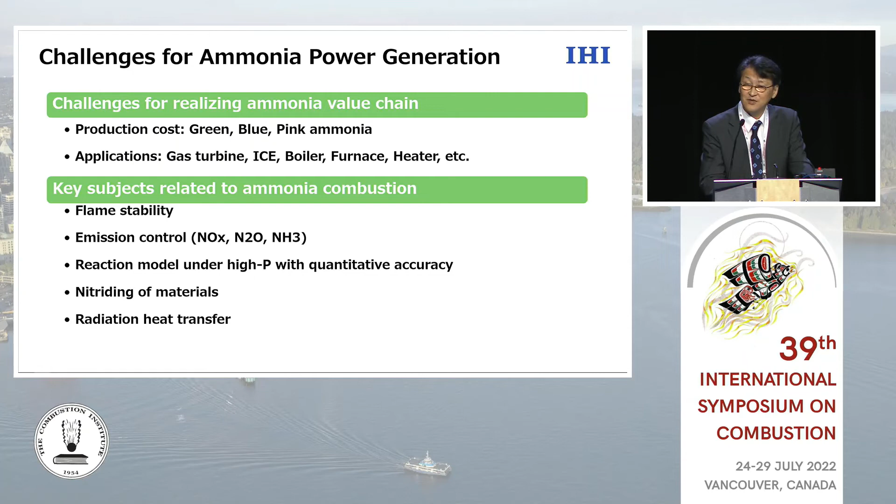Especially for gas turbines, pressurized gas turbines are a very promising technology in the future. So the chemical kinetics of ammonia at high pressure are very important, and we need very accurate models. Also materials, nitriding, and heat transfer are critical. This is cost, but I skip it.

This is my last slide. We are now at the entrance of the ammonia world, so many things will happen in the future. We will work with everybody who is interested in this technology. Thank you for your cooperation.

So, more or less, hydrogen production very much depends on the electricity cost, and so if you consider green hydrogen, the critical point is $20 to $30 per megawatt hour. So very cheap electricity is necessary. So conventionally, it's almost impossible. Only Australia, Saudi Arabia, Chile, or somewhere, maybe the United States, with big gigawatt solar could achieve this level.

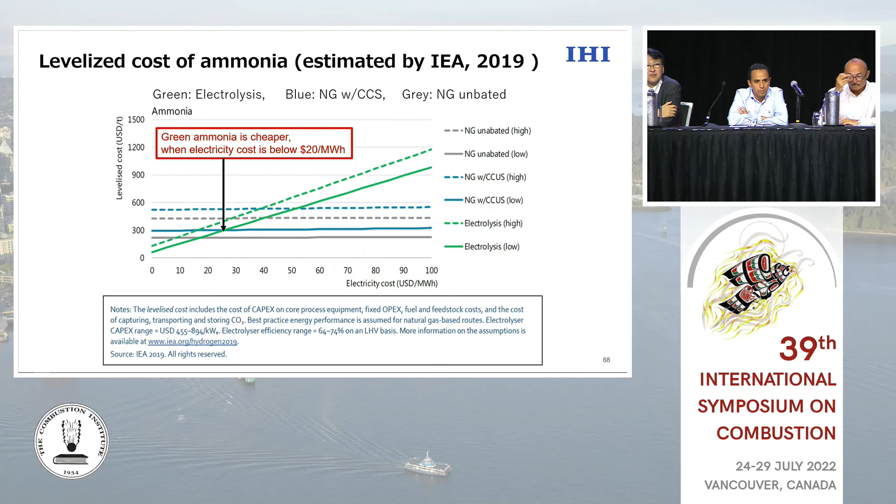Okay, I'm Stephen Lucas. I'm also from Colorado State, and I believe one of you mentioned that your company, among your combustor systems, also works with glass companies. Yes. I know that glass production uses a very great deal of natural gas, but the furnaces, in the short term, are semi-disposable because of erosion, both from the glass and from the gas combustion itself and the effect that has on the refractory. Have there been attempts to design new furnaces to use hydrogen, with the subsequent high temperatures and the possible refractory effects that could have?

Maybe Mohamed will comment more on this, but I can start to answer. Yes, there has been work on that, either to use hydrogen, but also to electrify part of the furnace. But as you know, glass furnaces run for tens of years, so you cannot just stop the furnace and make some tries. So it's quite complicated to make a large-scale experiment to see if everything will go well with drastically changing the fuel. So we are working on this. And Mohamed, I don't know if you have extra comment with Glass Futures, for example?

Thank you, Sébastien. Yes, I think I mentioned that if you try to retrofit an existing glass furnace with hydrogen firing burners, at this moment there are challenges that you have to take into account before a significant investment, and that includes the structure and materials of the walls in order to maximize the heat transfer to the load, as well as, of course, linking it with electrification. So, at least based on the experience we had, it is not a straightforward fuel switch from natural gas to hydrogen. It does need some research.